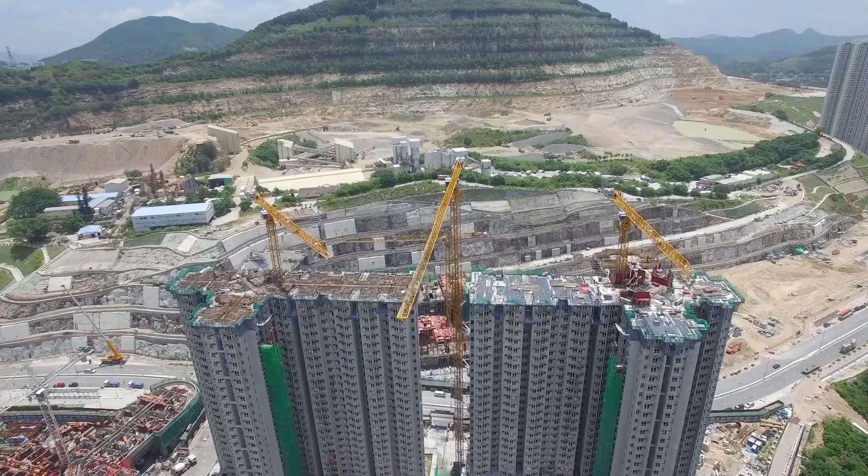As the effects of climate change are felt across the world, and as we know, the construction industry is responsible for as much as 40% of man-made carbon emissions, it's time to work on the concept of eco-friendly houses much more seriously.

An eco-friendly house is an environmentally low-impact home, designed and built using materials and technology that reduce its carbon footprint and lower its energy needs. Before constructing an eco-friendly house, we have to plan carefully, taking into account the different pillars of an eco-friendly house.

Now we have to study the site and surroundings. By doing a proper survey, we look at local culture and tradition, and materials and resources which are locally available. We look at existing features of the site like the slope of the site, available vegetation, whether we have buildings around, surrounding water bodies, etc. Once we are done with the study of site and surroundings, we will think about passive strategies.

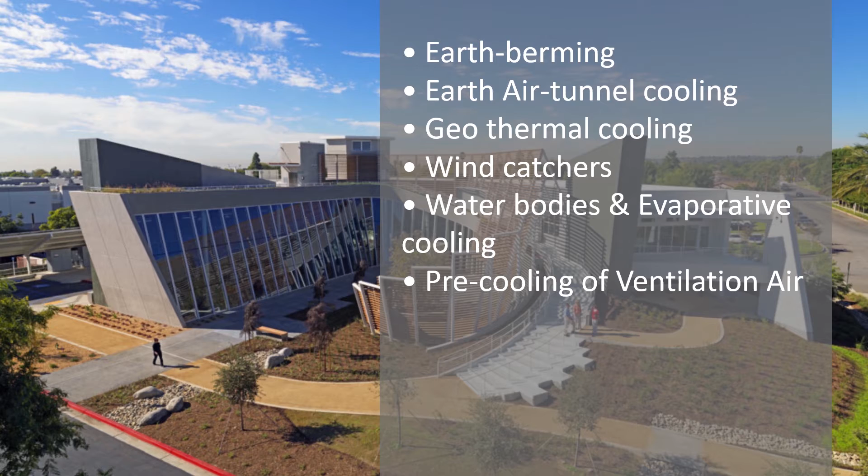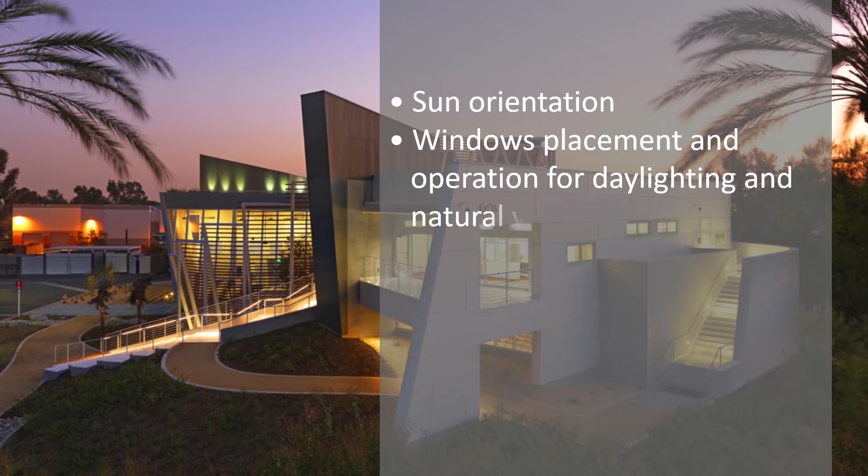We implement strategies like earth berming, earth air tunnel cooling, geothermal cooling, wind catchers, water bodies and evaporative cooling, and pre-cooling of ventilation air. These passive strategies are solutions to physiological objectives. Passive strategies such as considering sun orientation and climate when siting and being thoughtful about window placement and operation are used to best manage daylighting and natural ventilation and go a long way in reducing energy requirements for the building.

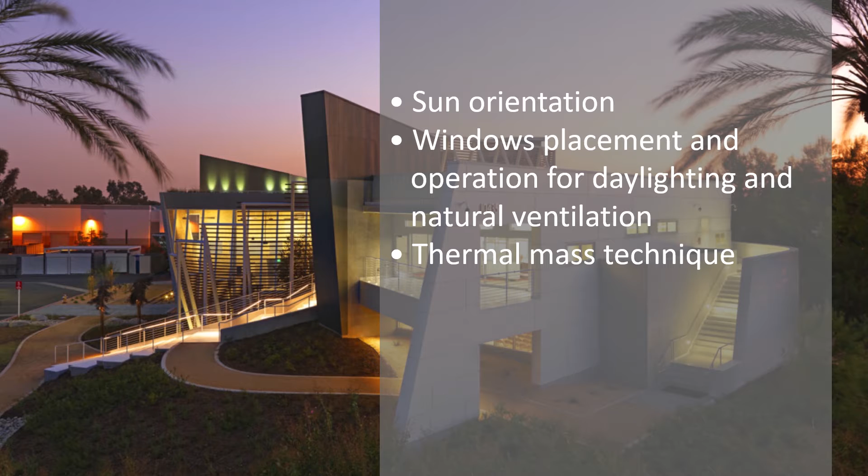In certain climates, the thermal mass technique can be used to harness solar energy. In such cases, thick walls absorb heat from the sun during the day and release it into the building at night. Look at the picture. The building has sloped walls. A narrower building allows light to penetrate deeper inside, and by sloping the walls, we allowed for even more window surface area. It has connectivity with nature. Views of native trees and plants allow for connectivity to nature and the landscape overall.

In a warm climate, it is very essential to harness cool air. A centrally located cooling tower uses water evaporation to force the cool air down the tower and into the building, while a separate tower allows the hot air to rise out. It has thick walls, which absorb heat slowly during the day and release it during the cool night. This insulates the interior environment against the extreme outside temperature swings. And the bioswale in the building allows reuse of stormwater.

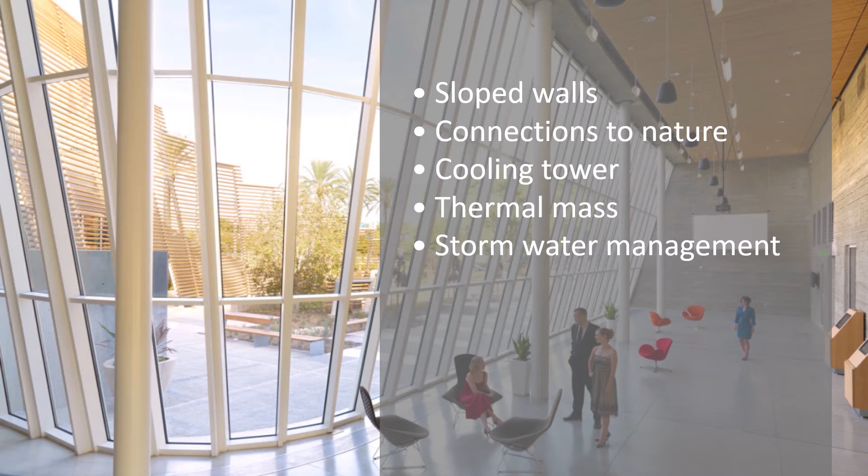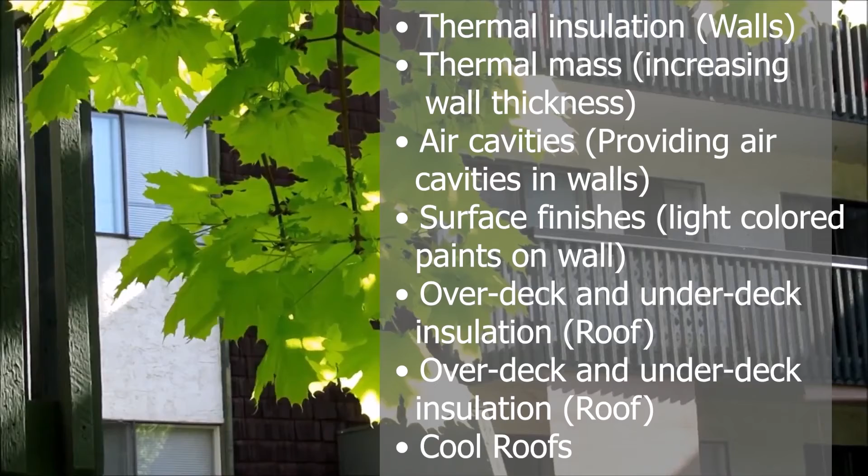A building envelope is the physical separator between the conditioned and unconditioned environment of a building, including resistance to air, water, heat, light, and noise transfer. It gives support, control, and finishing to the house. It gives support by transferring structural and dynamic loads. It gives control over the flow of matter and energy of all types. And it gives finishing by meeting desired aesthetics.

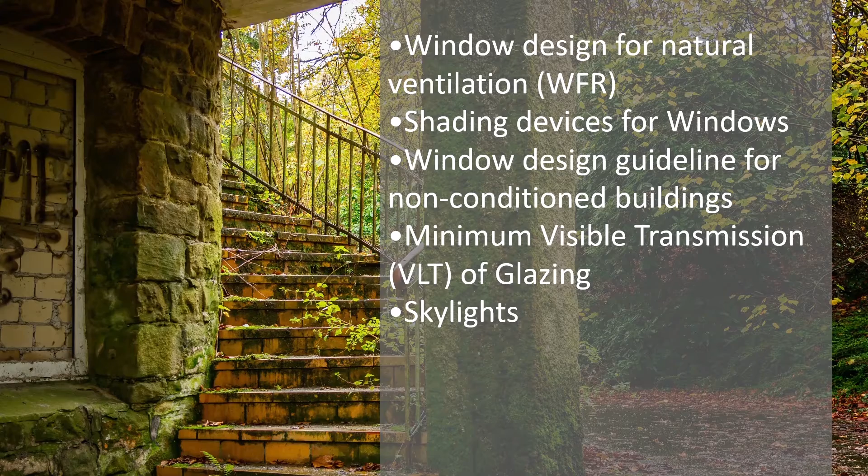We should use material that is locally available and has less impact on the environment. It should be recyclable and durable and helpful in maintaining a healthy indoor environment. We can get closer to eco-friendly by making it a priority to purchase steel, concrete and finishing materials such as carpet and furnishings from companies that use environmentally responsible manufacturing techniques or recycled materials.

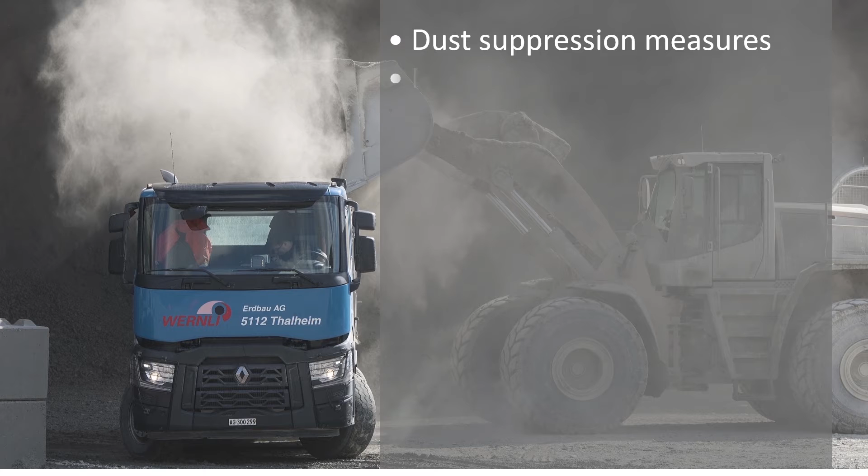Sustainable construction practices. This requires a lot of planning. We have to plan soil erosion control measures and dust prevention measures. We have to barricade all around the site to prevent dust from going out, to prevent noise from going out. We have to protect existing vegetation also.

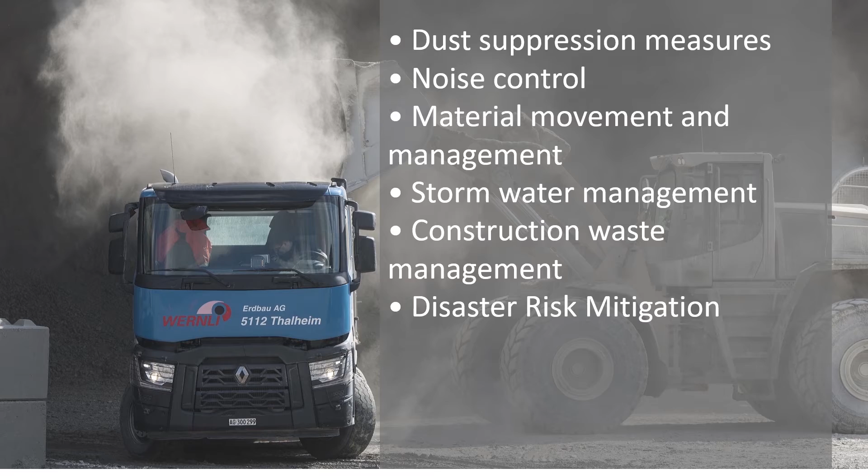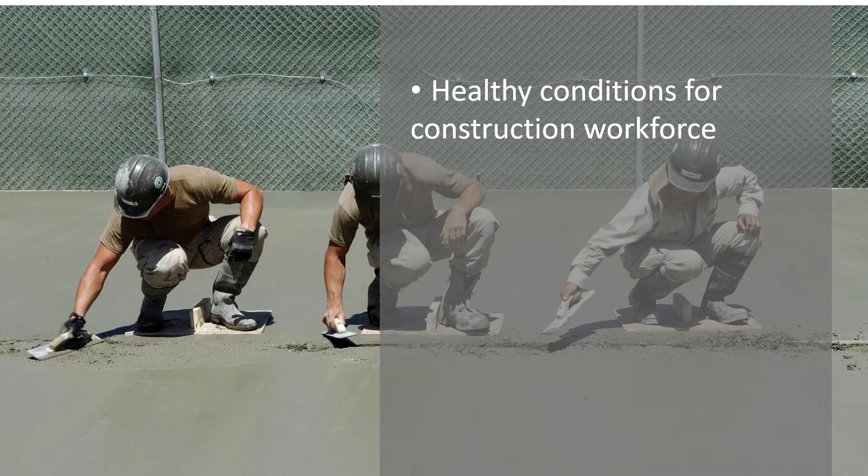Along with the construction, we have to provide facilities for the construction workforce. We can do this by providing healthy living conditions, by abiding by safety measures, by providing basic amenities, and by ensuring health and education for their children.

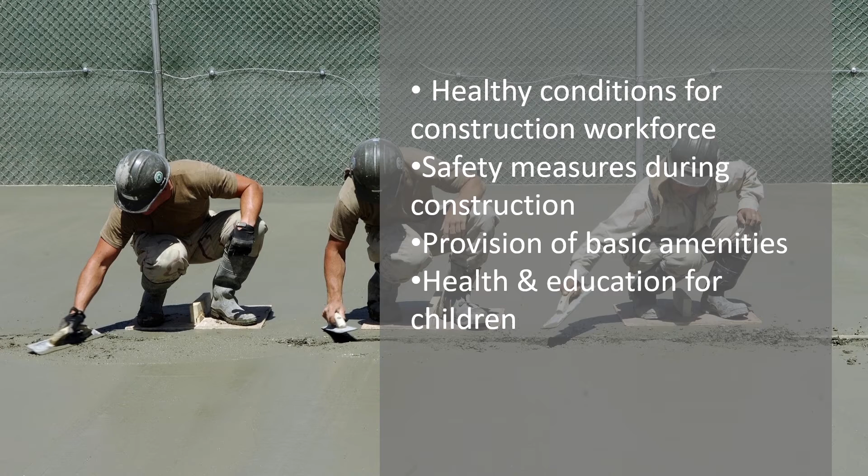For building an eco-friendly house, we have to look at active strategies also. We have to implement high efficiency electrical, plumbing and other systems which are designed to have a small environmental footprint. To implement active strategies in lighting, we should ensure the minimum requirement of light by harvesting daylight. We should use a highly efficient lighting design and lighting system. Lighting sensors and controls can greatly help in achieving an energy efficient house.

The indoor environment quality of a building has a significant impact on health, comfort and productivity. An eco-friendly building maximizes daylighting, and it has appropriate ventilation and moisture control. It also optimizes acoustic performance.

Landscaping can make a big impact on house water consumption. By using trees, plants and grasses that are native to that area, we can greatly reduce irrigation needs. Landscaping can also be used as a part of passive strategies by planting trees that shade the roof and windows during the hottest time of the day. Solar heat gain inside the building can be reduced this way.

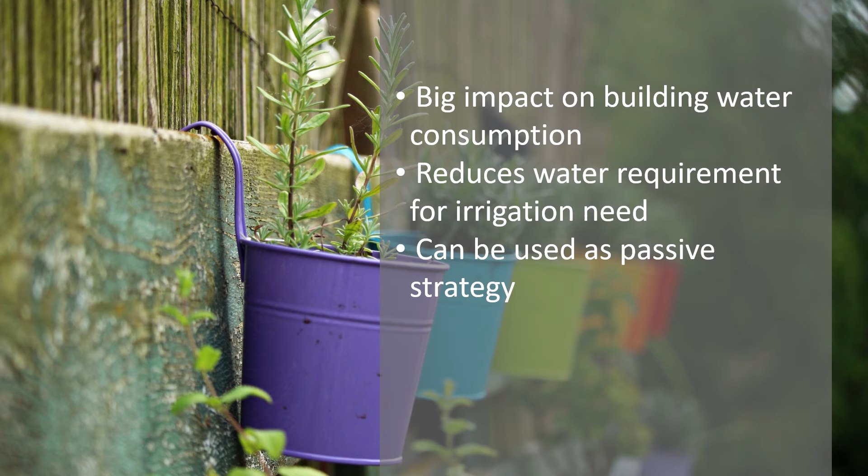Renewable energy systems, including those that harness solar and wind energy, are also good options for buildings. These systems are often used in conjunction with passive design strategies. Sustainable waste management is another aspect of an eco-friendly building. We have to ensure organic waste management on site and waste recycling. An eco-friendly house must have a well-functioning rainwater harvesting system and wastewater treatment system for sustainable water management.